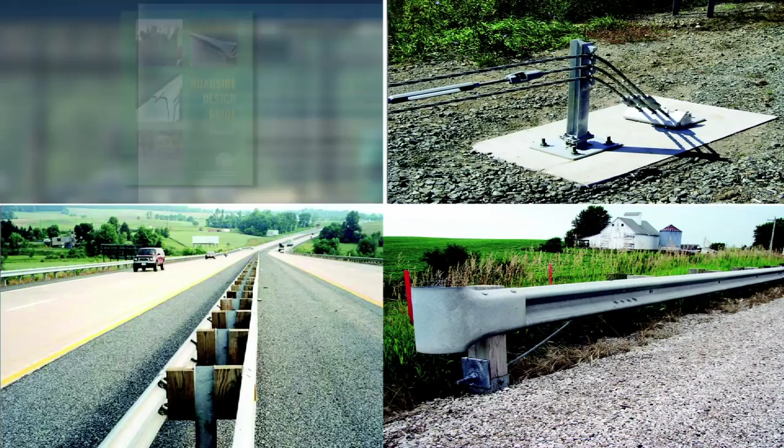The American Association of State Highway and Transportation Officials is pleased to announce that the 4th edition Roadside Design Guide is now available at the AASHTO bookstore. Developed by AASHTO's Highway Subcommittee on Design and its Technical Committee for Roadside Safety, this critical resource contains the latest practices and expertise on ways to prevent deaths and injuries by improving roadside safety.

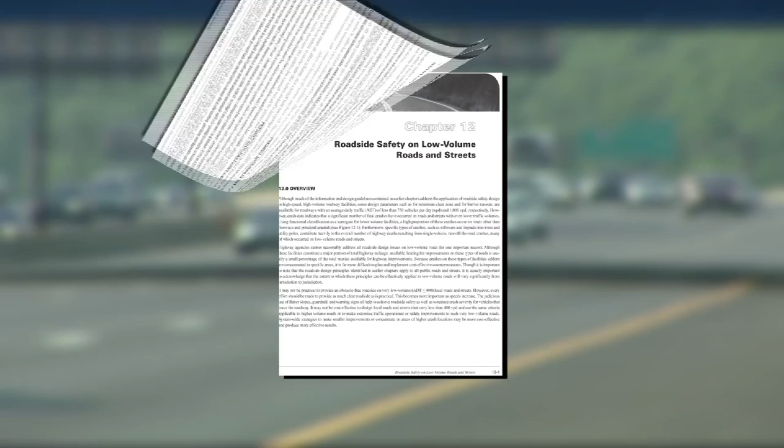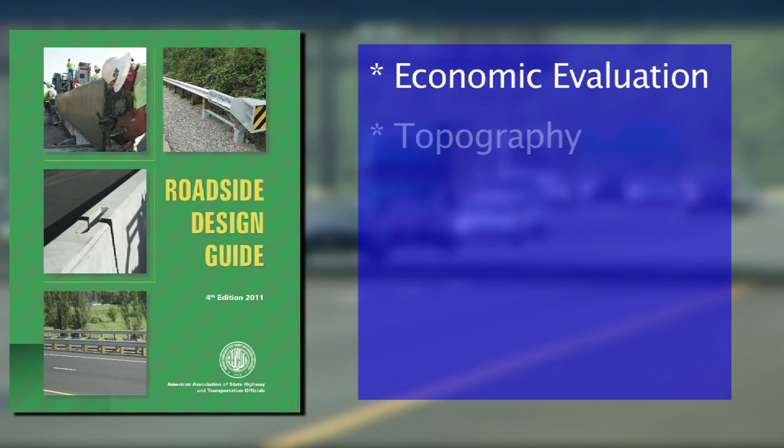The 12-chapter, 356-page guide includes a new chapter on enhancing roadside safety for low-volume roads and streets, and it uses graphics and other visual enhancements to illustrate key topics such as economic evaluation, topography, drainage, traffic barriers, control devices, and fixtures like mailboxes. Last released in 2002, the new 4th edition is also available for the first time as a web-based publication.

The web-based guide can be accessed immediately online through a web browser. No downloads or installation disks are necessary. The web-based guide also includes interactive features such as enhanced search and print capabilities and bookmarking. Users also have the ability to post questions and add notes.

Web-based users also receive exclusive access to a variety of bonus materials, including links to related publications, websites, webinars, special videos, and software not available with the print or PDF versions. All purchasers can choose between a single and multi-user license, which has no annual renewal fee and comes with automatic publication updates as they become available.

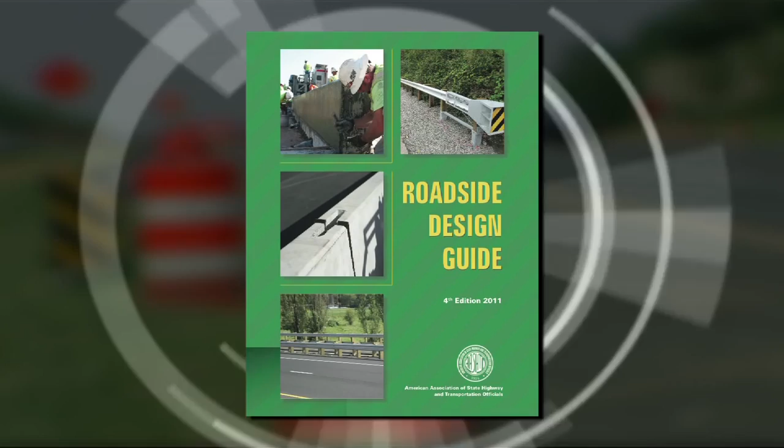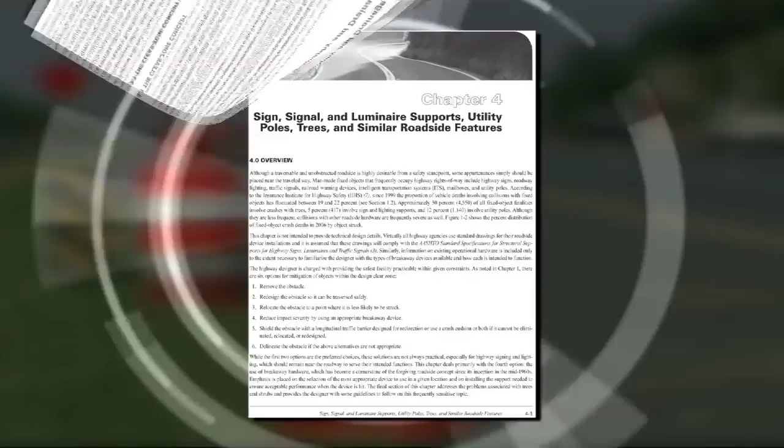This detailed publication was developed by AASHTO's Technical Committee on Roadside Safety. With this short video, I hope to provide you a brief overview of the contents of each chapter and the important highlights, updates, and revisions that have been made.

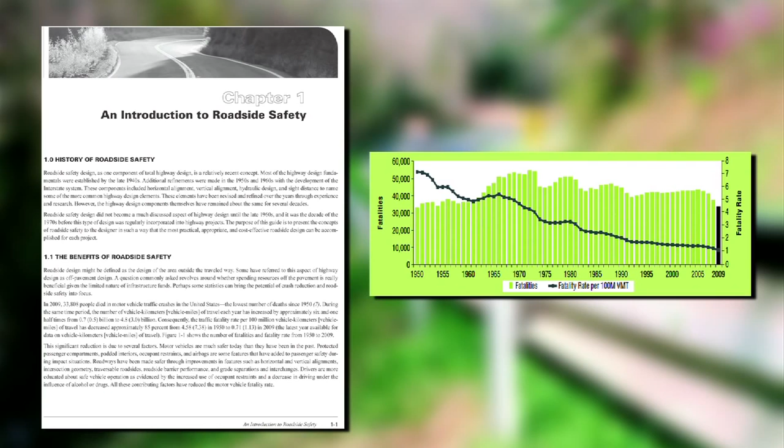Chapter 1, titled An Introduction to Roadside Safety, provides information on the history and benefits of roadside safety, as well as updated roadside crash statistics. Because Chapter 1 is the introduction to the new Roadside Design Guide, AASHTO is providing a free download of this chapter on the AASHTO online bookstore.

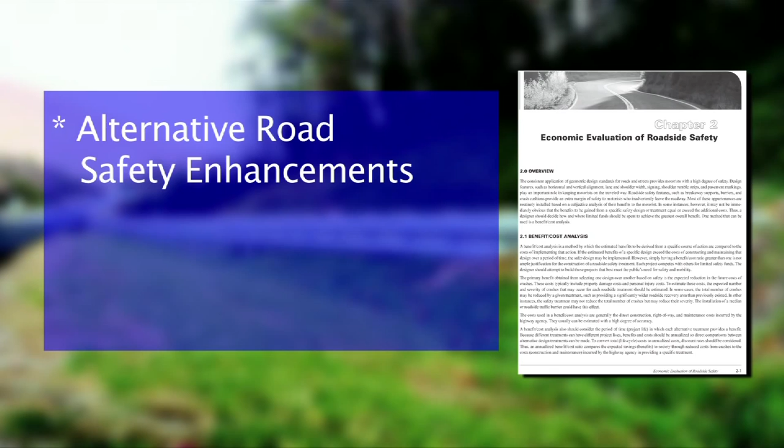Chapter 2, titled Economic Evaluation of Roadside Safety, focuses on various methods that designers can use when selecting appropriate alternative roadside safety enhancements. It specifically recommends the use of cost-benefit analysis to determine a ranking of alternatives in the absence of better local information.

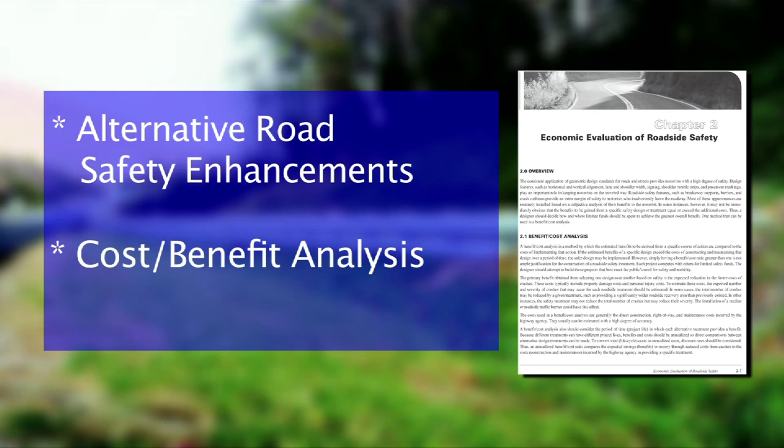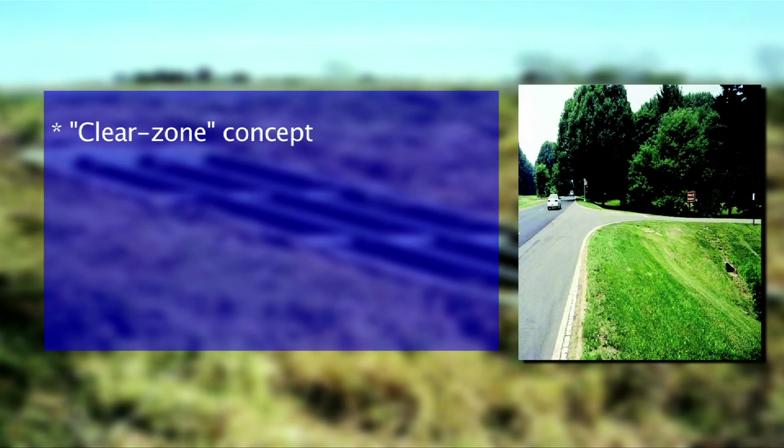Chapter 3, titled Roadside Topography and Drainage Features, introduces the clear zone concept. The chapter includes suggestive relative clear zone values and several examples of their application. It should be noted that clear zone terminology is coordinated with the 6th edition AASHTO Green Book, and this chapter contains discussions on clear zone for auxiliary lanes.

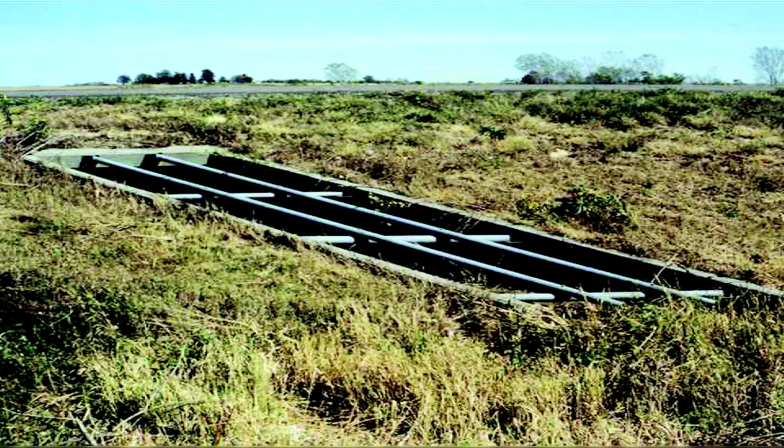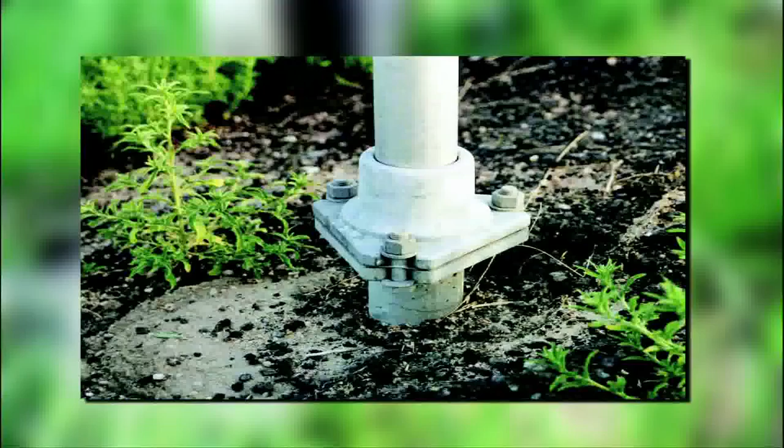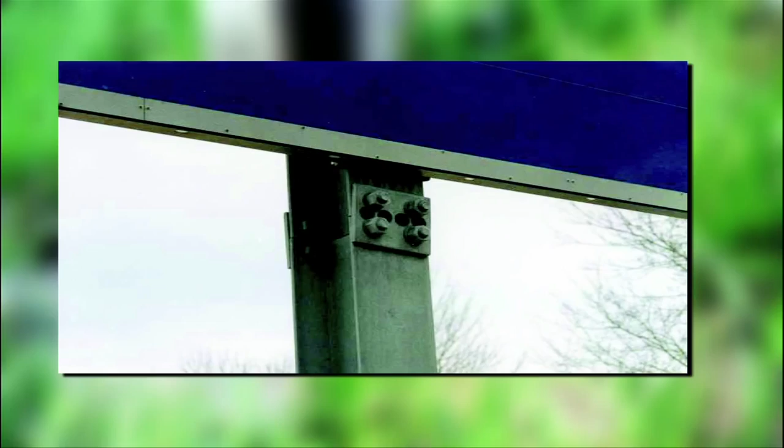Chapter 4, titled Sign, Signal, and Luminaire Supports, Utility Poles, Trees, and Similar Roadside Features, includes information on the use of sign and luminaire supports within the roadside environment. This chapter covers both small and large signs, criteria for breakaway and non-breakaway supports, and other roadside features such as mailbox supports, utility poles, and trees.

This chapter received major revisions stemming largely from research produced by the NCHRP 500 Volume 8 publication. This chapter is updated with the current MUTCD breakaway requirements.

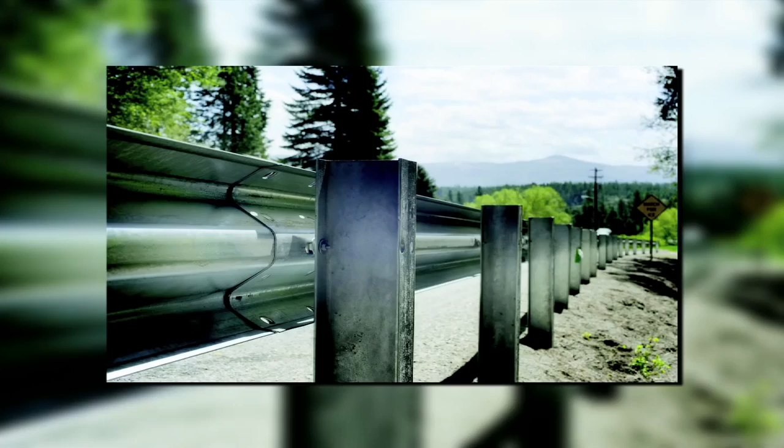Chapter 5, titled Roadside Barriers, is another chapter that contains major revisions. The most important addition being the inclusion of test criteria from the AASHTO Manual for Assessing Safety Hardware, or MASH, and its implementation plan. This chapter also updates information on motorcycles and barrier design. It also recommends a reduction in runout length for barrier design and provides guidelines for upgrading existing systems.

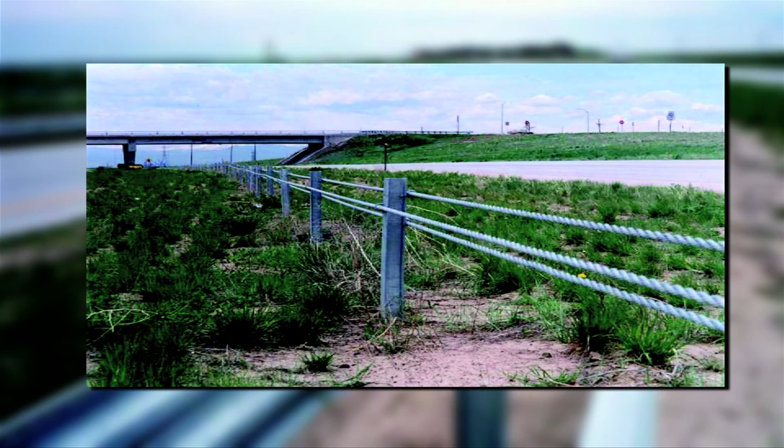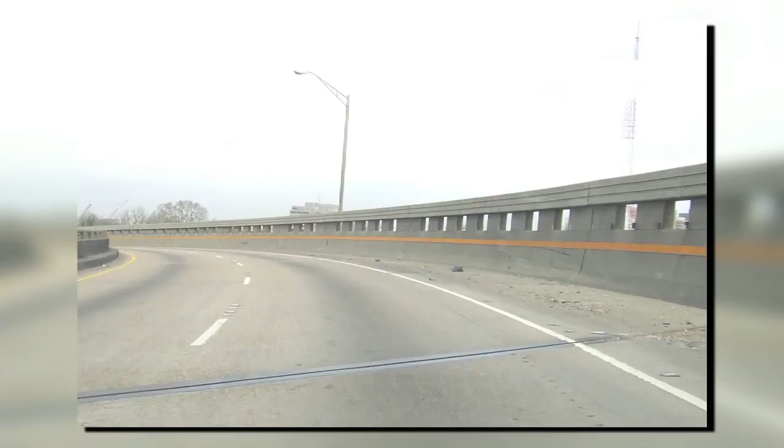Chapter 6, Median Barriers, includes updated information on hardware including proprietary cable. Chapter 7, titled Bridge Railings and Transitions, contains information on appropriate bridge railings and has been updated to include discussion on MASH and LRFD. It also incorporates a new section titled Protective Screening at Overpasses.

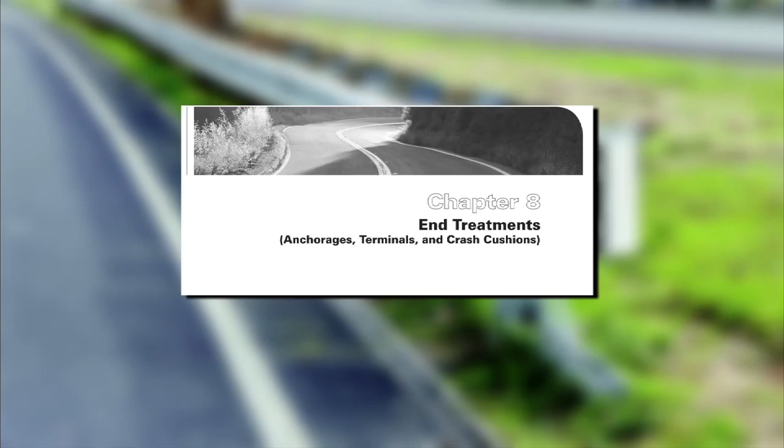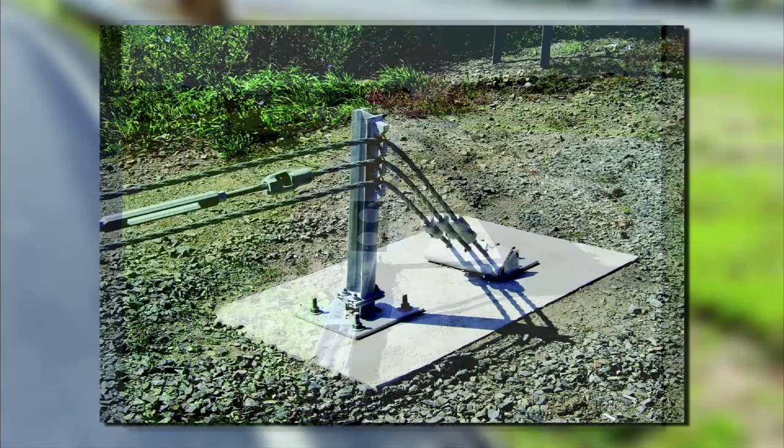Chapter 8, titled End Treatments, underwent major revisions in this edition. This chapter provides current and state-of-the-practice information on barrier end treatments and crash cushions. It also includes a new table of comparison maintenance requirements for end treatments.

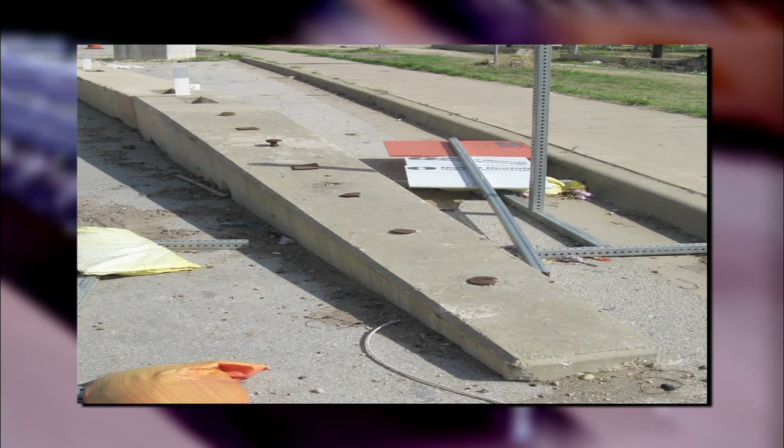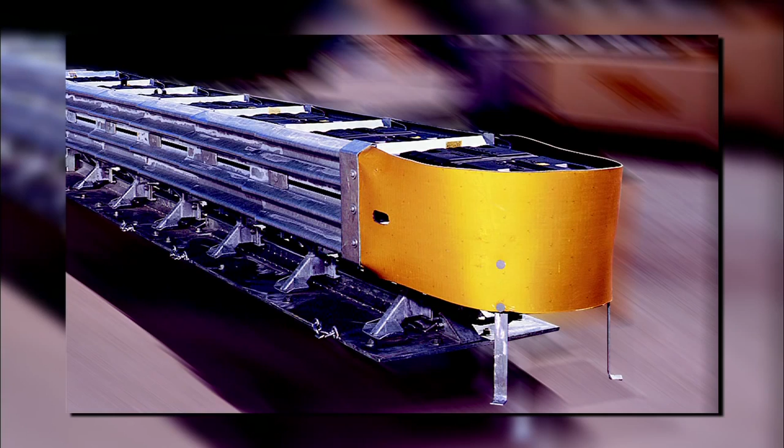Chapter 9, titled Traffic Barriers, Traffic Control Devices, and Other Safety Features for Work Zones, discusses the application of roadside safety concept for the temporary conditions found in construction or maintenance work zones. This chapter includes a new discussion of generic and proprietary portable concrete barrier designs, reduces the barrier deflection in the pinned barrier type systems, and discusses when to use water-filled barriers versus longitudinal channelizers.

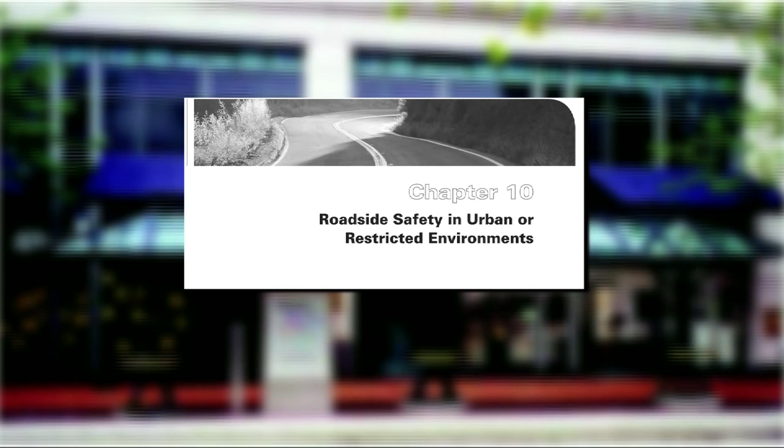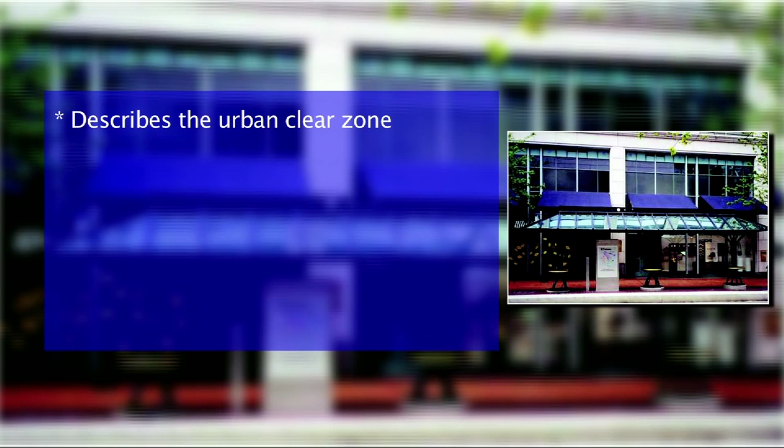Chapter 10, titled Roadside Safety in Urban or Restricted Environments, also received extensive revisions. One of the most important is the description of the urban clear zone, both the minimum and desirable. This chapter also features updated information on the urban clear zone concept and discusses why a 1.5 foot minimum lateral offset is not a clear zone.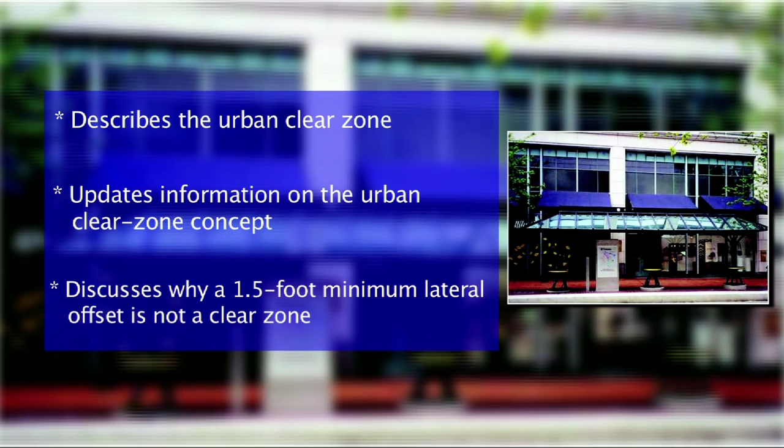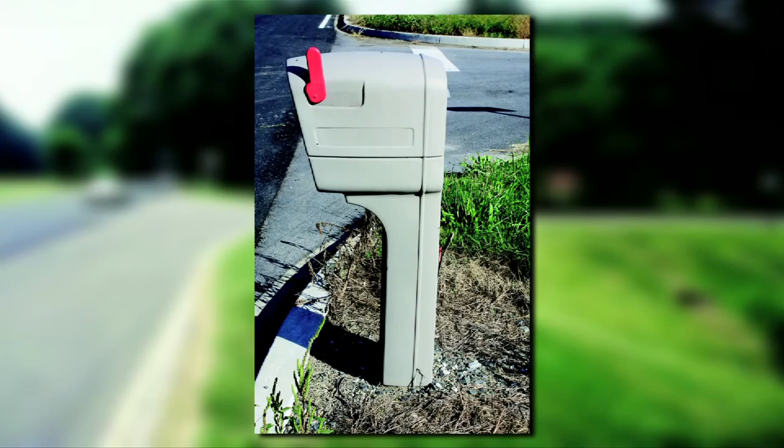Chapter 11, titled Erecting Mailboxes on Streets and Highways, provides information on mailboxes and mailbox turnout design, including vandal-proof mailboxes, secure locked mailboxes, and lightweight plastic designs. Because of the specific nature of this chapter, it will be available as an individual download PDF on the AASHTO online bookstore. The Roadside Design Guide also includes a new chapter, Chapter 12, titled Roadside Safety on Low-Volume Roads and Streets.

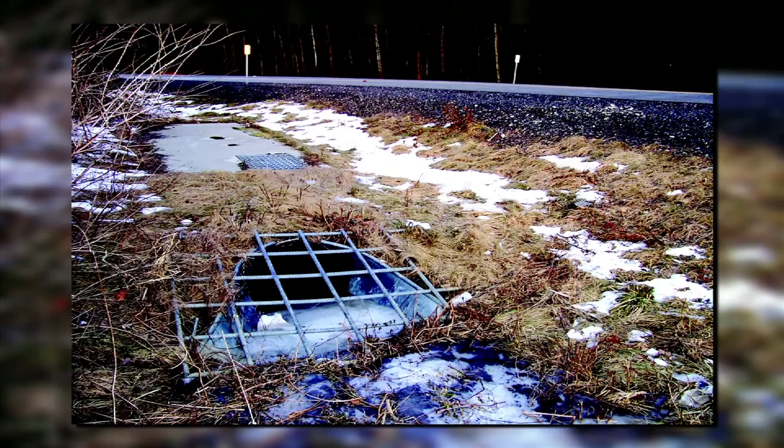This chapter discusses the application of roadside safety concept on very low-volume roads and streets. It highlights low-cost strategies, discusses clear zones for low-volume roads, and describes the roadside hardware appropriate for these facilities.

Regarding additional revisions to the Roadside Design Guide, one key change is the coordination of terms and concepts with the new 6th edition, A Policy on Geometric Design of Highways and Streets, known as the Green Book, which is scheduled to be released in the fall of 2011. This coordination of terms between these two publications serves to create a more cohesive design of roadways and streets.

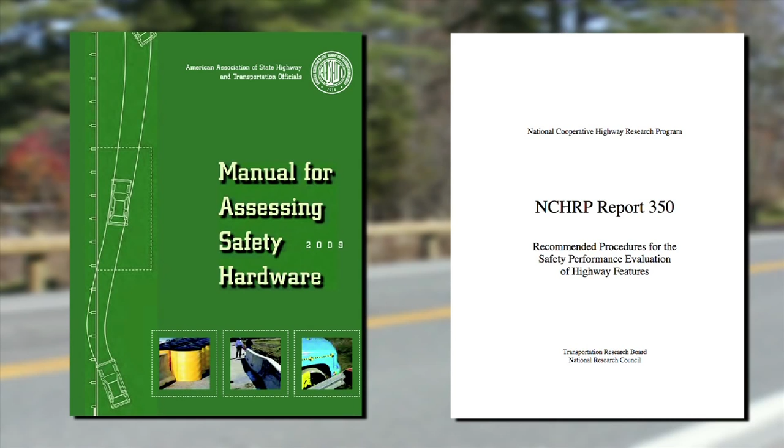The guide has also been updated to include hardware that has met the evaluation criteria in the NCHRP Report 350, Recommended Procedures for Safety Performance Evaluation of Highway Features. It also begins to detail the most current evaluation criteria contained under MASH.

If you'd like to purchase a copy, it is available in 3 formats: print, electronic PDF, and for the first time, a web-based subscription publication which includes enhanced features and bonus material.